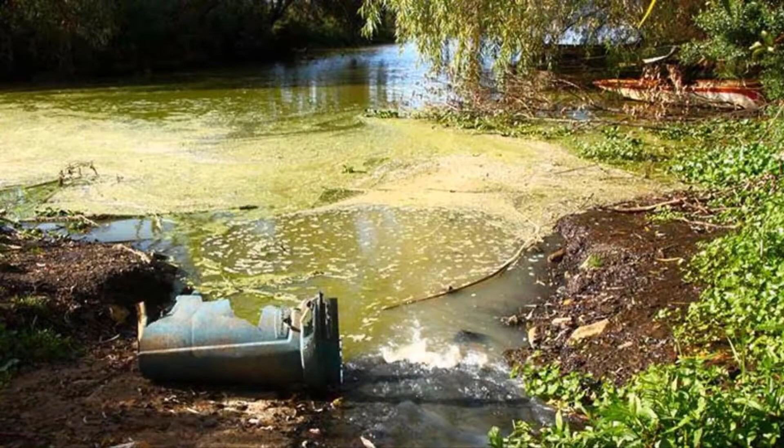Large growths of algae are called algal blooms, and they can severely reduce or eliminate the amount of oxygen in the water, leading to large amounts of illnesses and diseases of local fish. Some algal blooms are harmful to humans because they produce elevated toxins and bacterial growth that induce sickness if drunk, or if they come into contact with polluted water, or are consumed by tainted fish or shellfish.

Our team took an initiative to deal with this problem and find a solution that can be deployed worldwide. Instead of looking to retrieve nutrients after they have been applied to crops, we looked at the problem from another perspective. Through extracting the excess nutrients from the manure when it is applied, we eliminate any potential excess buildup in the resulting manure. Using this method, not only do we stop the problem of eutrophication, but our solution aids in creating a more eco-friendly fertilizer.

This would enable us to resell the treated manure to farmlands with little to no access to organic manure, hence increasing the fertility of their farmland. This would also mean that farmers can decrease their dependency on synthetic fertilizers, which not only emit gallons of greenhouse gases during manufacturing, but also result in even greater nutrient runoff in farmlands.

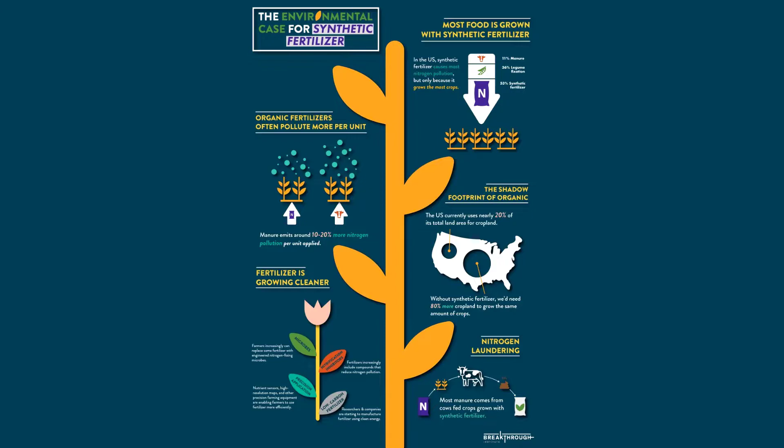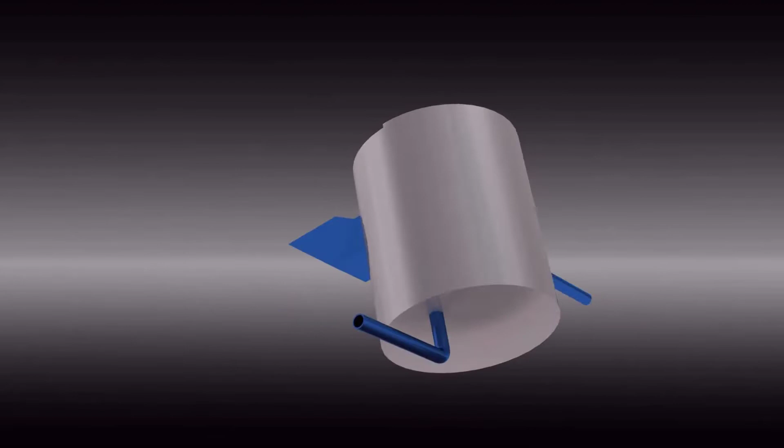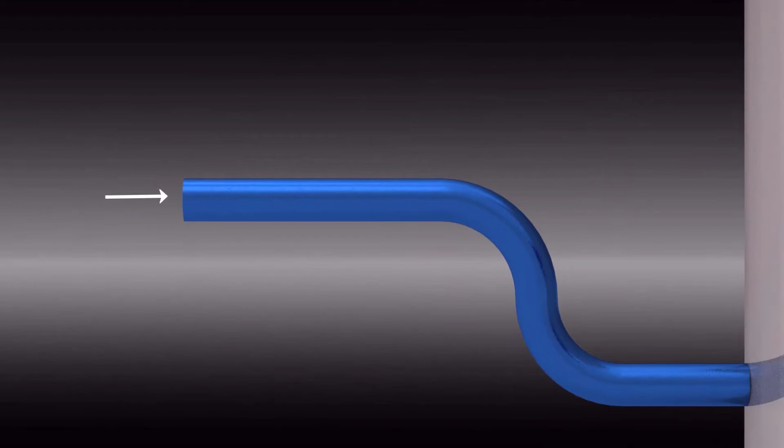Therefore, our team researched and developed a process that allows us to treat manure with a resulting nutrient balance that will not cause eutrophication. In addition, it will create more total fertilizer. Before the treatment process, we first need to separate the liquid and solid waste. This system is designed to separate solid manure from liquid manure from a sludge mixture. The manure mixture is first pumped into the homogenization tank from storage.

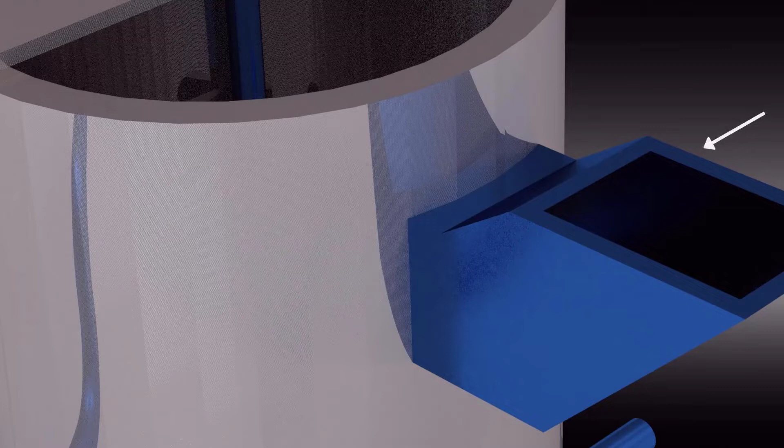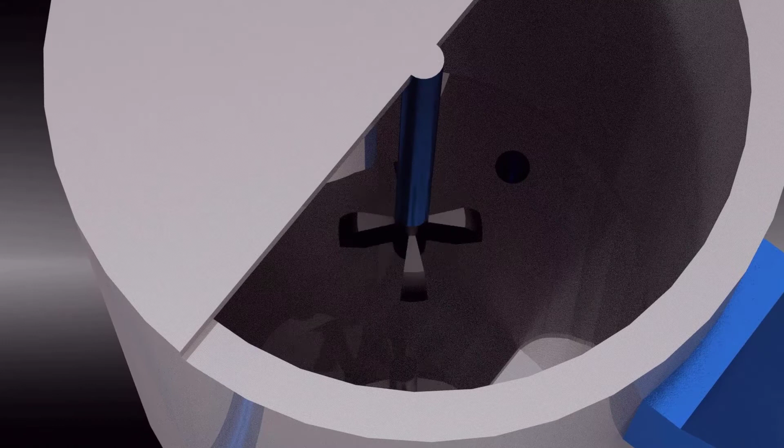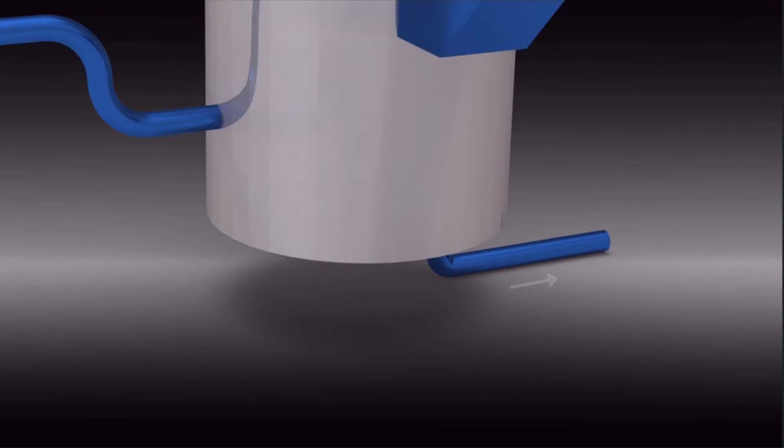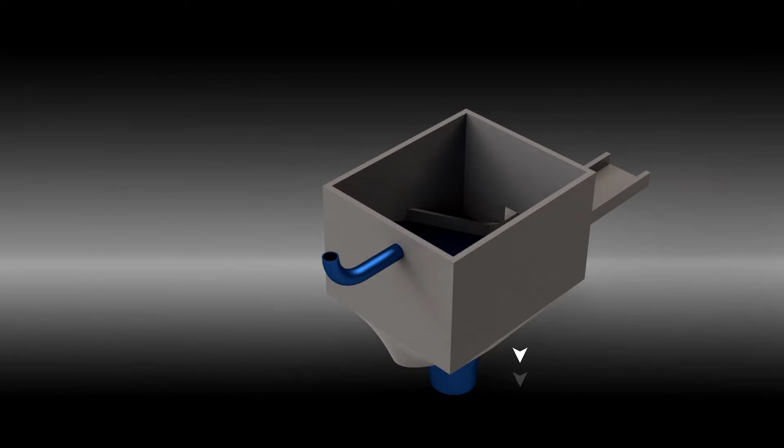After the mixing process is complete, the new mixture flows toward the separation screen. At the separation screen, the mixture flows in. It is then filtered, with the liquid manure flowing out to the next stage of treatment, while solids continue on and head to the appropriate storage space. Once liquid manure is separated, it is placed into the liquid effluent treatment system.

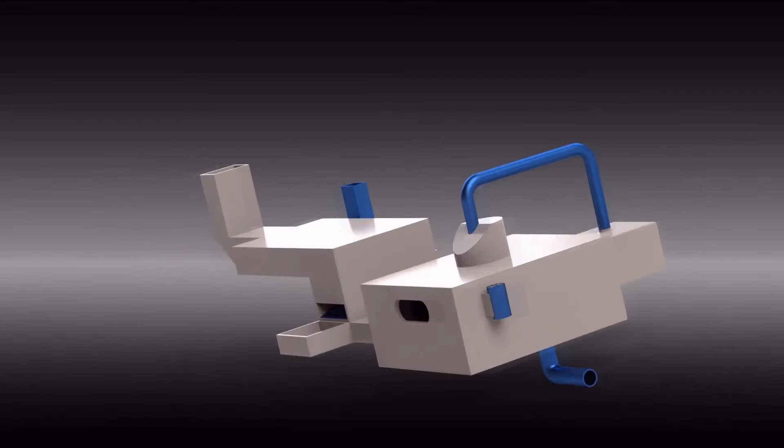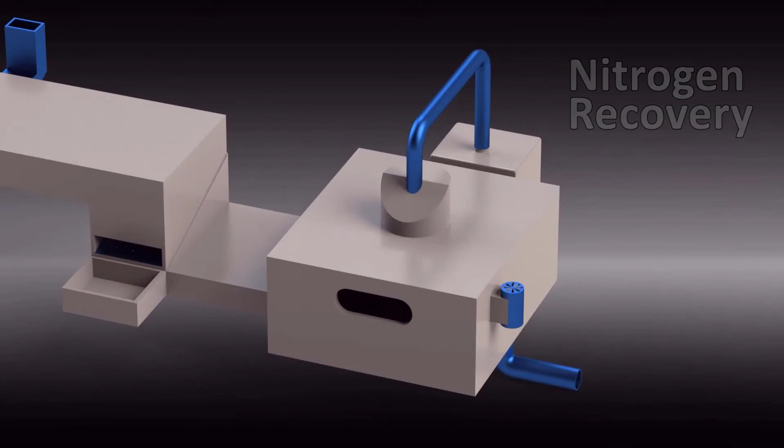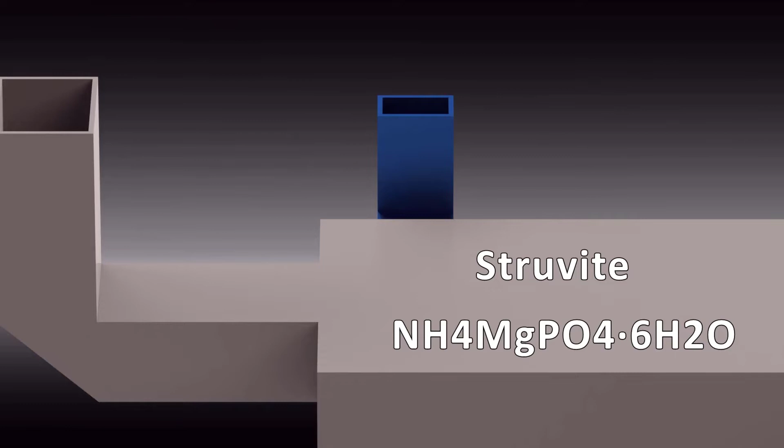In this system, there are two parts, one to extract phosphorus and one to extract nitrogen. In the first part, in order to extract the phosphorus, magnesium chloride is added to the liquid manure. This creates a solid substance called struvite, which is a crystalline granulate that can be used as fertilizer. Then, the struvite is filtered out through here, and the rest of the liquid manure continues through the system.

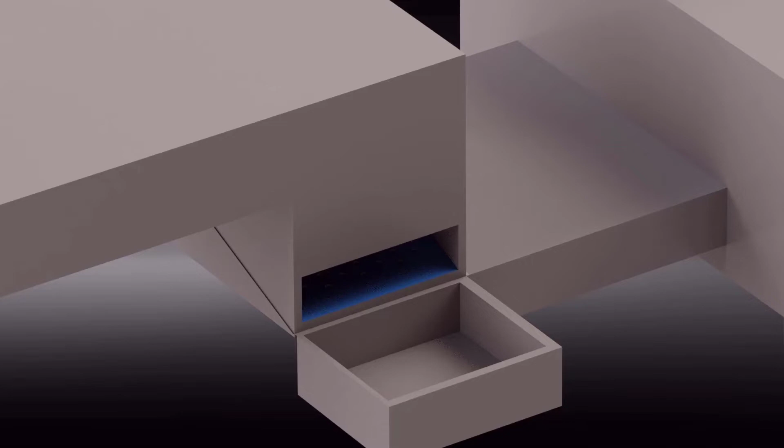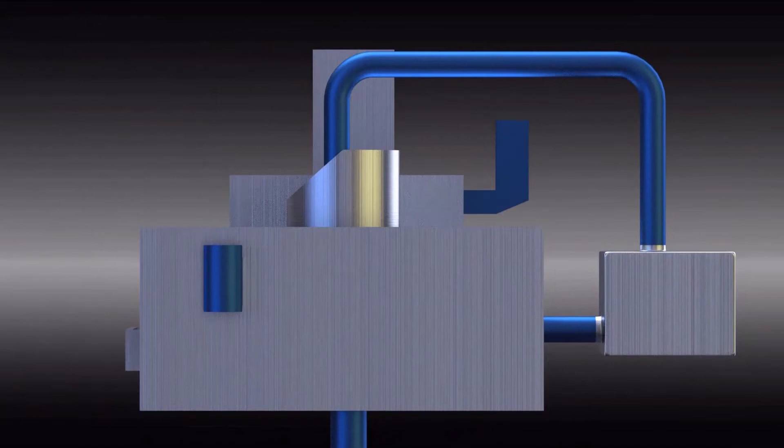In the second part, the nitrogen is extracted by using gas-permeable membranes. Diluted sulfuric acid is continuously circulated through the tubular gas-permeable membrane that goes through the liquid waste and back into the acid tank to extract the nitrogen. Then, the liquid manure exits the system and is ready for transportation.

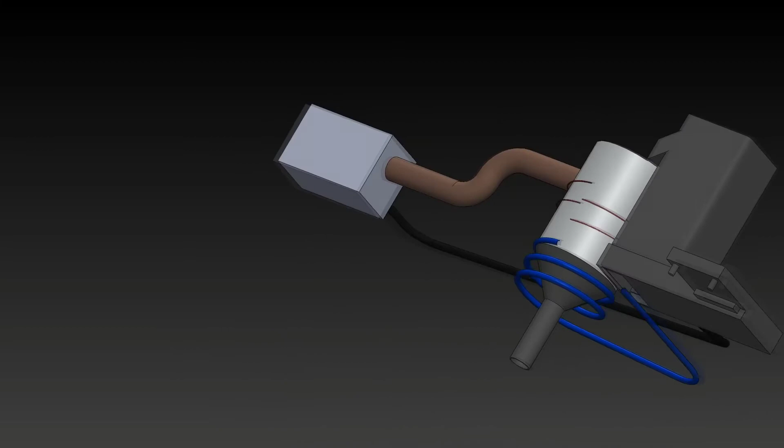Now we direct your attention to solid treatment. We utilize technology from other pyrolysis reactors to treat the solid manure in order to eliminate the risk of eutrophication. The first step in this process is to load the solid manure by feeding it into the drying chamber. Within the drying chamber are small buckets that carry some of the manure up to the next step, while the rest of the manure is dried up and collected here.

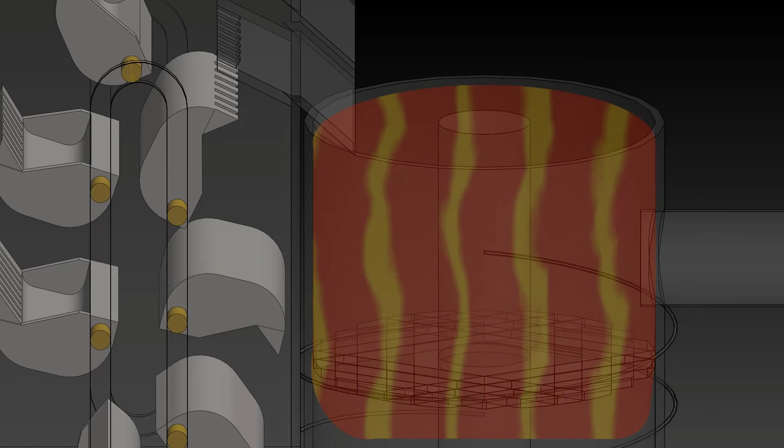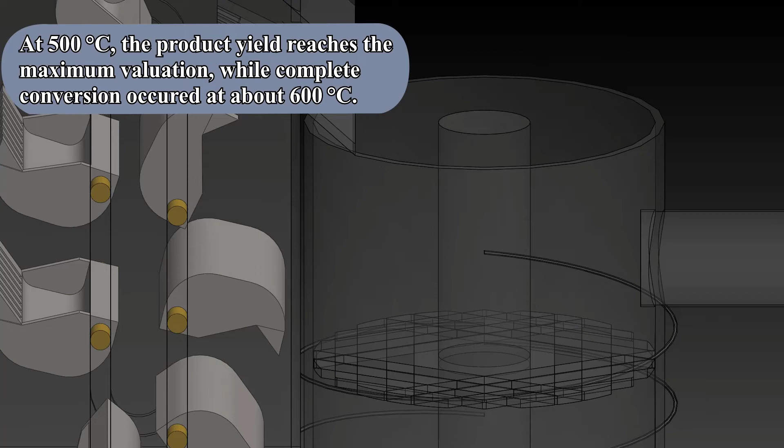In the second stage, the manure heads into the pyrolysis reactor, where any excess moisture immediately dries up just before the degasification process begins. This process allows the solid manure to get rid of any nitrogen and hydrogen it has within it. This is due to the very high temperature within the reactor, ranging anywhere between 450 to 600 degrees centigrade. This range allows us to control the efficiency of the conversion and control the outputted product.

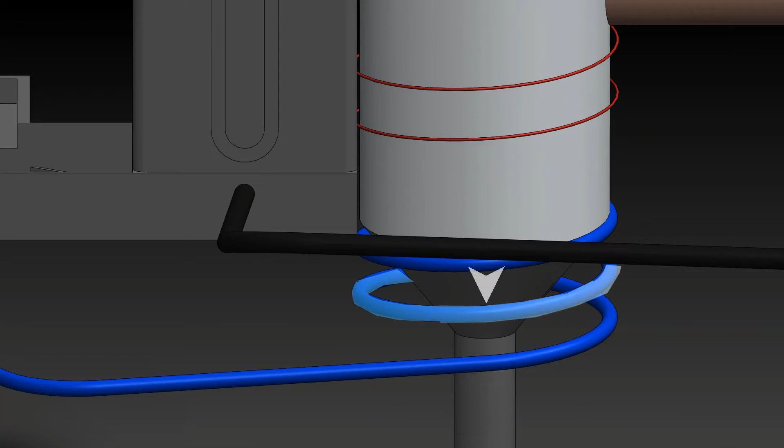The retrieved hydrogen gas from both the liquid treatment and the pyrolysis reactor can be reutilized in the heating stages as a fuel source. This would produce biochar, which is a high-performance organic fertilizer. The biochar is cooled back down and placed into storage, where it is mixed with the previously collected and untreated solid in a 2-to-1 ratio mixture. This creates a fertilizer mixture that is used as a high-performance organic fertilizer, since it contains just enough nutrients so that it will not cause eutrophication.

With the three processes, we end up with 3 different kinds of fertilizers, which would not cause nutrient runoff: struvite crystals, treated liquid fertilizer, and treated solid fertilizer.

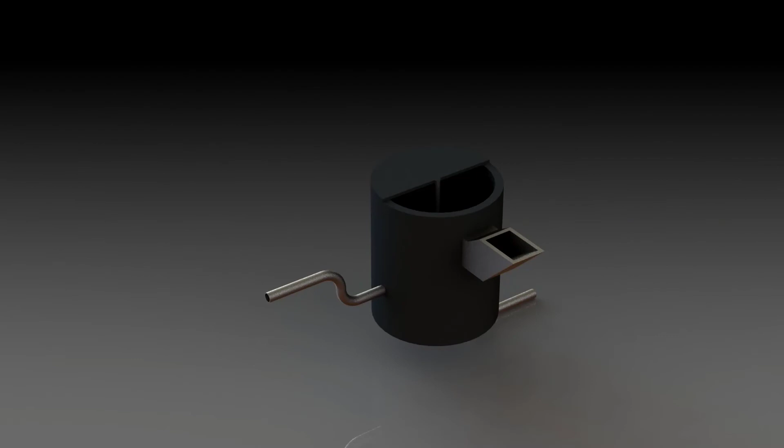Moving on to our cost analysis, we found out that all 3 processes combined can finally turn a profit. Previously, developers of these technologies were not able to create profit from their projects, due to each process working individually. Because excess products are shared between processes, we decrease the cost of waste disposal and resources needed. Profits will vary from location to location, but our studies showed that we can have a profit margin of around $200 per ton of waste treated.

Eutrophication is not just a problem in Canada, but in fact worldwide. It is a devastating phenomenon that affects millions of communities, farmers, fishermen, marine life, and consumers internationally. Fortunately, with the aid of MTP, we were able to tackle and eliminate this problem, resulting in higher crop yields, more revenue for the farmers and fishermen, and overall healthier aquatic ecosystems.

As a starting company and MTP technology, we plan for our solution to benefit our company on a long-term scale, expanding to different areas in British Columbia, then eventually to the rest of Canada. As this will be a long-term solution, consumer demand will increase over time, aiding support for our long-term production and income. We have already surveyed a location to the north of Armstrong, British Columbia, which will be located near the center of an accumulation of farmers' fields.

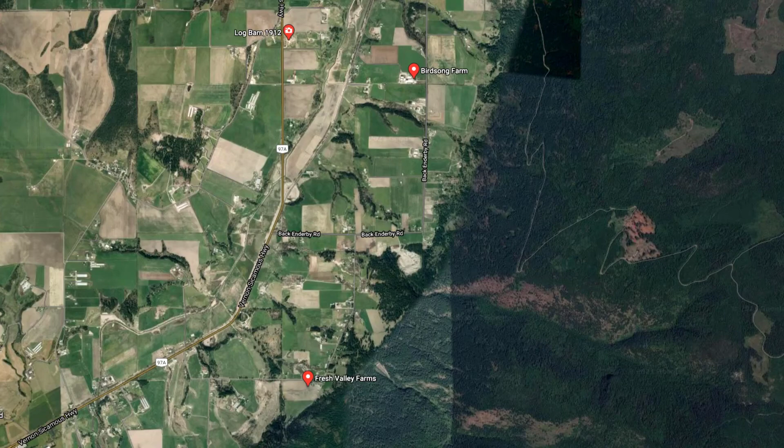We contacted most of these farmers in advance to collect data about how much manure they produce and the availability of mutually working with those farmers. More research must still be done to complete a case survey of the surrounding location, but results so far show this location to be very effective for startup.

MTP plans to start a revolution worldwide, akin to the Neolithic Revolution, a revolution that will push the world into a more sustainable future, where crops are produced sustainably and with higher availability.